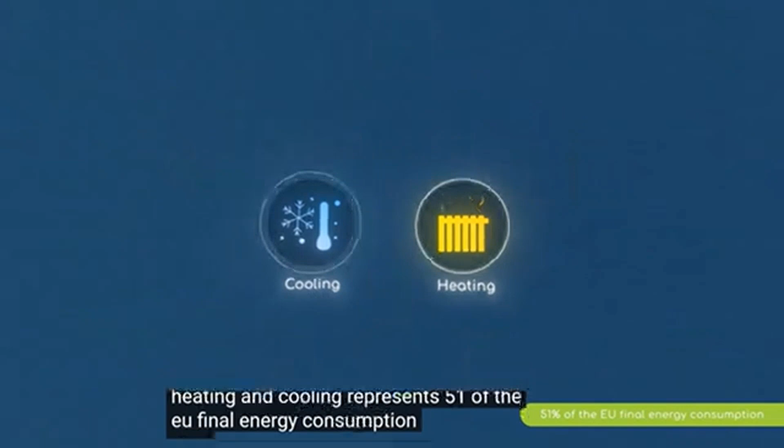Heating and cooling represents 51% of the EU final energy consumption. Over 3/4 of these needs are supplied by fossil fuels, unsustainable and harmful for the environment. Bioenergy is an available, local, renewable alternative, allowing local economies to thrive. It consists of using organic feedstock from agriculture, agro-industry, forestry and municipal waste to generate energy in various forms. 75% of bioenergy is used for heating and cooling, yet factors hinder its use.

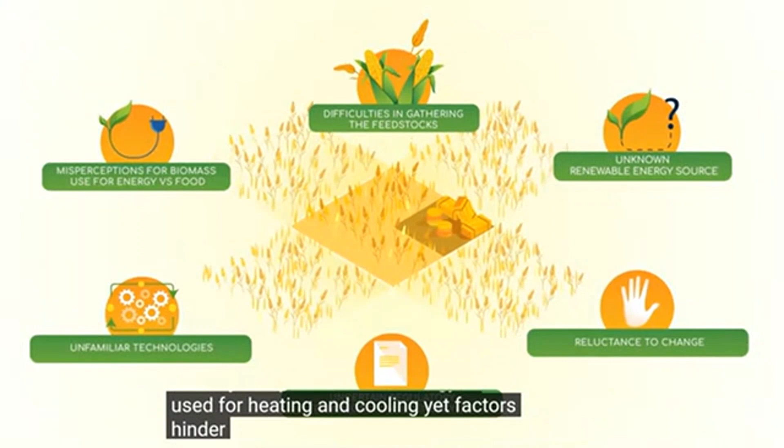Introducing BECoop, a project funded by the European Union, aiming to democratize the use of bioenergy for heating and unlocking the potential of community bioenergy. BECoop is inspired by the ResCoop model, allowing individuals and communities to reclaim and democratize a decarbonized and renewable energy production, a cooperation between users, logistic chain actors, and local authorities. This circular economy approach empowers individuals and territories that embrace it, increasing energy independence, security, and resilience through local resources. It allows heating cost savings at a lower environmental impact, increasing social benefits in terms of well-being and reduced energy poverty.

BECoop brings in knowledge and activities to improve the conditions to create a strong international bioenergy community. It provides tools to support existing and future community projects, making their development easier and further cutting down time and cost efforts. BECoop tests the implementation of community bioenergy heating schemes in 4 complementary pilot cases with different characteristics in Spain, in Greece, in Poland, in Italy. BECoop, unlocking the community bioenergy potential.

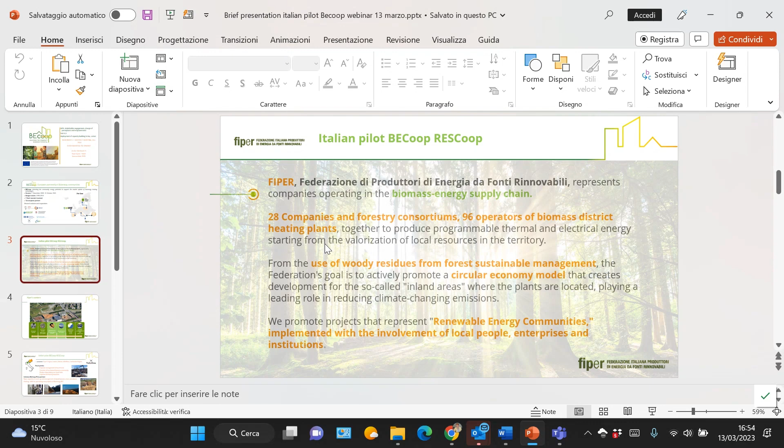There are here some numbers of FIPER, but if you want, we'll see later. I would like to show a little bit our reality as the Italian pilot. We identified 3 municipalities in Valtellina Valley: Tovo Sant'Agata, Lovero, and Mazzo Valtellina, situated in the Lombardia region in the north of Italy. We chose these municipalities because they were important focal points for us to develop and start sensibilizing the people to develop and make a startup of biomass district heating.

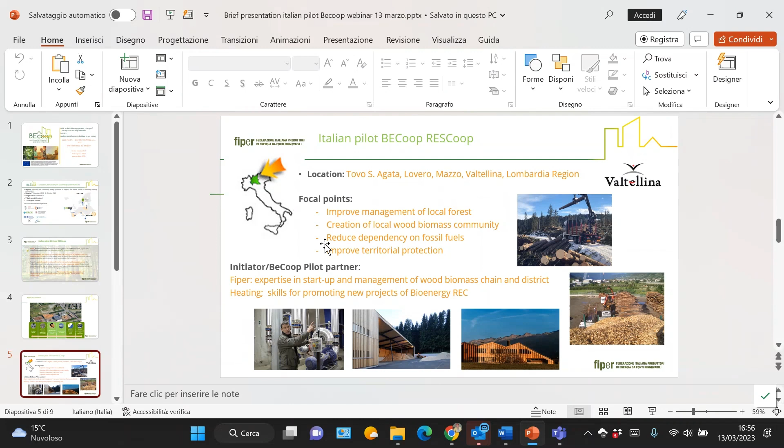There is a necessity to improve the management of local forests. There are a lot of forests, but the amount of wood cut is really small. The creation of a local wood biomass community, and of course, in this moment, reducing the dependency on fossil fuel - our goal is to reach autonomy from fossil fuel. We are the initiator because, as I said before, we are specialized in biomass district heating, and we support these three municipalities to start a new plant.

Some data - we always say that if you want to develop a biomass district heating, and Professor Caputo will explain better in technical terms afterward, the first thing you have to do is an analysis about the local biomass, the availability of local biomass. This year, there is a lot of potential biomass to use, from public forest, private forest, and also from pruning, so agricultural residues.

So we always say that if somebody, a municipality or an enterprise, wants to start with a biomass district heating, the first thing to check is the availability of biomass locally and in a short chain. We estimated the potential of biomass residue forest available in the area, and we realized that there is enough to develop the biomass district heating.

So why did we decide to involve these 3 municipalities? Because there are different companies, forests and expertise in the territory. The administrators and of course the mayors are really motivated because they wanted to implement a new biomass district heating to manage and to prevent the environmental risk in the mountain area.

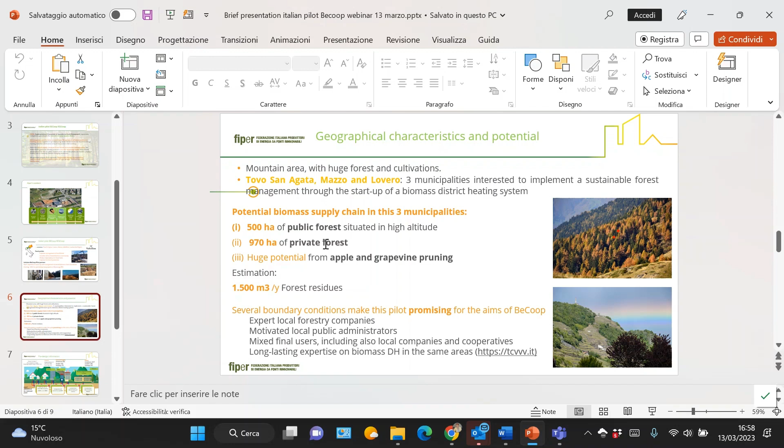Just a short. Just a summary. Hello.

Just a short, a really little picture about the idea of the project. We would like to start up this district heating in the center of the district. It will be located in Tovo Sant'Agata, and then the network will connect the people in Tovo, Mazzo and Lovero. So that one is really useful because it's a plant that will connect 3 different municipalities, and as you know, in mountain areas it is quite difficult to look for a consultation with different stakeholders.

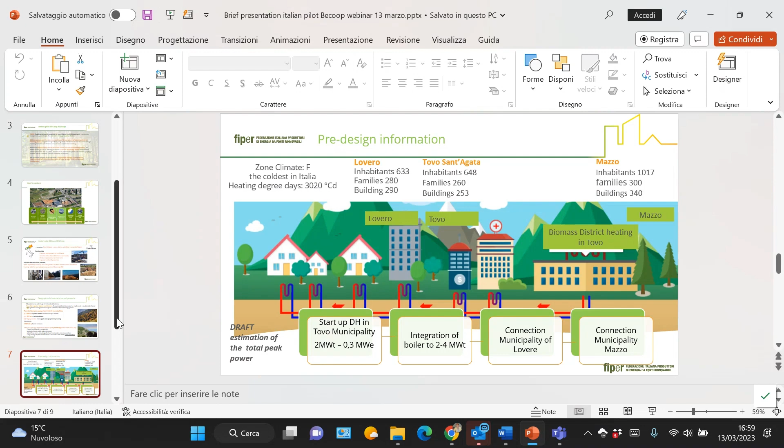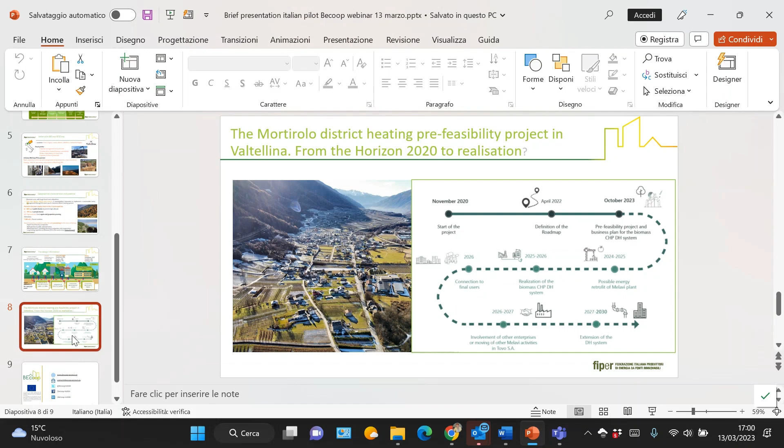What we did in collaboration with Politecnico was a participative process. We realized a roadmap from November 2020 until the development of the biomass district heating. And to sensitize the citizens, we realized a survey that was distributed in each building and each family. It was a really important action to sensitize, to involve more the people, the clients, the final users in the project.

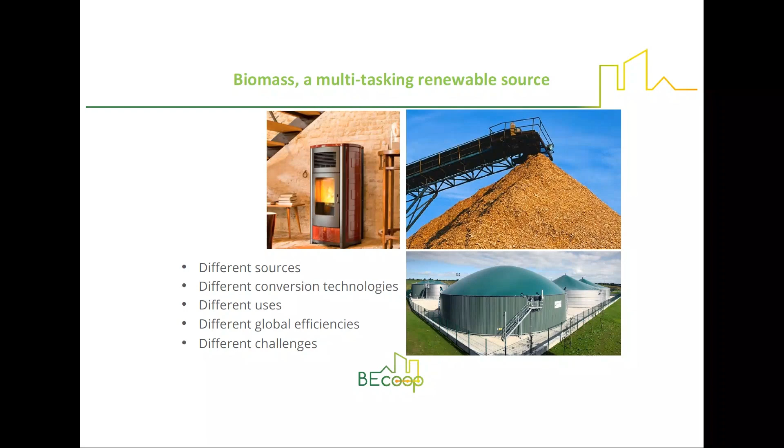So going to the next slide, we can have a look at the most adopted type of biomass in district heating systems. This form of biomass is represented by wood chips from forest maintenance and pruning that are suitably chopped and then can be adopted in combustion systems or other thermal systems. So we can go ahead with the next slide.

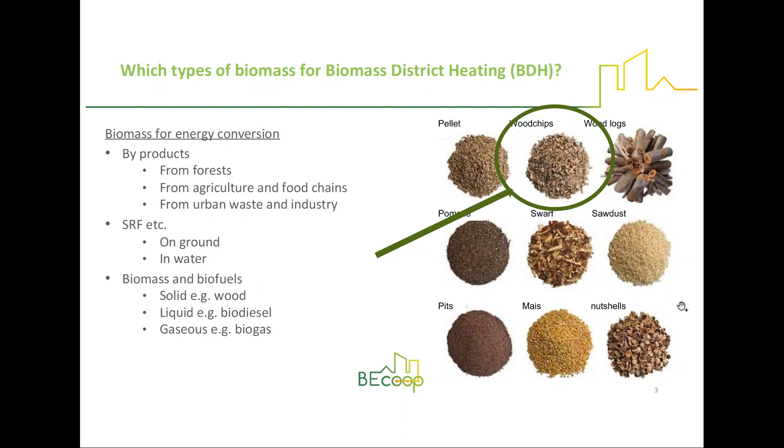And what about biomass district heating in order to exploit these renewable sources, contributing also to lower CO2? One raising question can be if biomass is a renewable and carbon neutral source. The carbon neutrality of biomass is a very discussed topic, and without going into detail, since these issues have been discussed and addressed for years, we can say just that biomass combustion returns the carbon stored during the tree growth to the atmosphere. So we can consider that the carbon cycle is neutral.

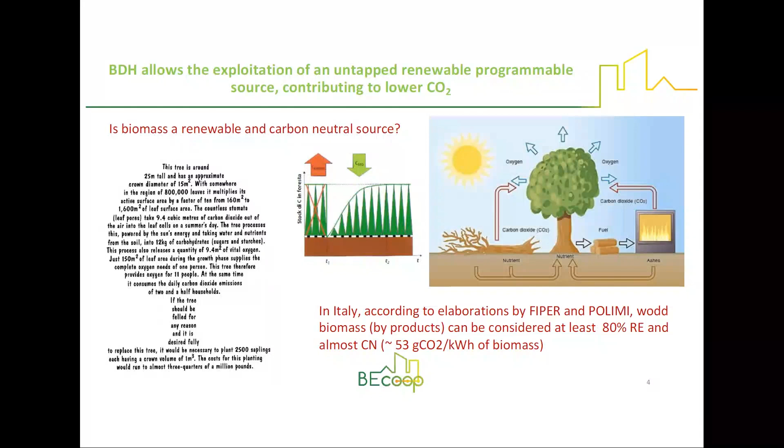Okay, but we can also consider the other CO2 emissions that we have along the overall chain, including also the transportation, the transformation, and so on. And here in red, you can see also the results that are valid for the Italian context. So we can consider biomass at least 80% as a renewable source. And okay, this data can be considered conservative, so we can be also more optimistic. And we can go ahead with the next slide, that is why adopt wood biomass for district heating.

Okay, for using biomass in district heating, we have to verify a set of favorable boundary conditions, such as, for example, as Vanessa told before, the availability of these sources at territorial level, but also the availability of a heating demand in the same territory, and also the availability of machinery for the treatment of biomass. In many cases, this source is more present than we can expect.

For example, if we consider Italy, differently than we might think, there is a big heritage in terms of forest and woodlands. This heritage represents about 1/3 of the Italian territory. And this land is constantly increasing. So it is being protected and managed. And the protection of woodlands represents a cost for the territory and for the country. But we can manage this territory properly in order to have benefits in addition to costs, so in order to have these sources for thermal purposes, for example, for district heating. We can go ahead with the slide.

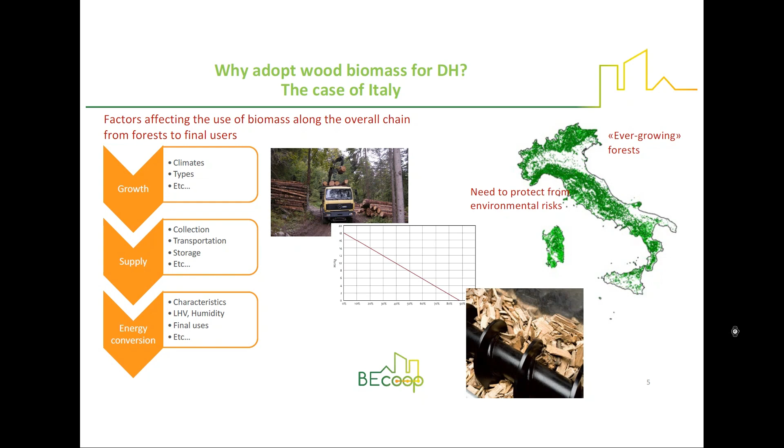Okay, so in addition to these issues, we have also to cope with the energy goals that we have at European level. And also we have to cope with other challenging global issues such as climate change and fossil fuel availability. So we have to take into account that biomass can help us also in this direction. And going ahead again, we have also a problem related to the approach to biomass, because this is a renewable source, but renewable and available does not mean wastable. So we have to adopt biomass with efficient, effective technologies.

Biomass is still adopted at world level in obsolete appliances, such as fireplaces, stoves, and so on. This equipment must be abandoned, and district heating, in this sense, can represent an effective technology to exploit this potential in an efficient way.

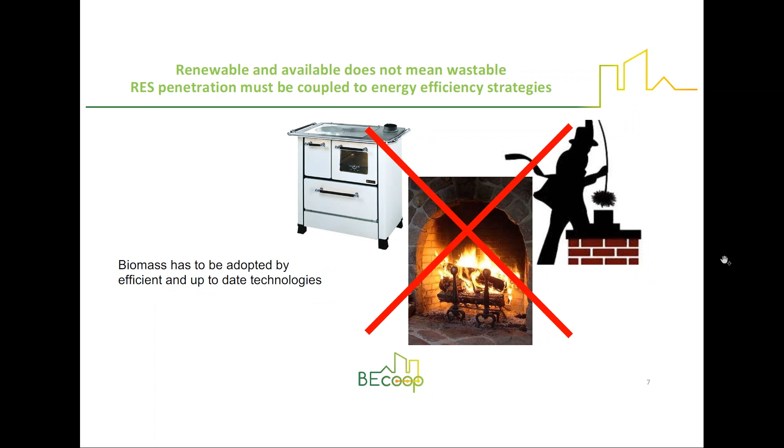Let's have a look at the main features that we can find in this slide. For example, the withdrawal in Italy is around 20–30% in our forests, and the average in Europe is about 60–70%. So we can exploit this source better. Biomass is programmable, and we can adopt this source for thermal use. So biomass district heating is the most effective technology to this end.

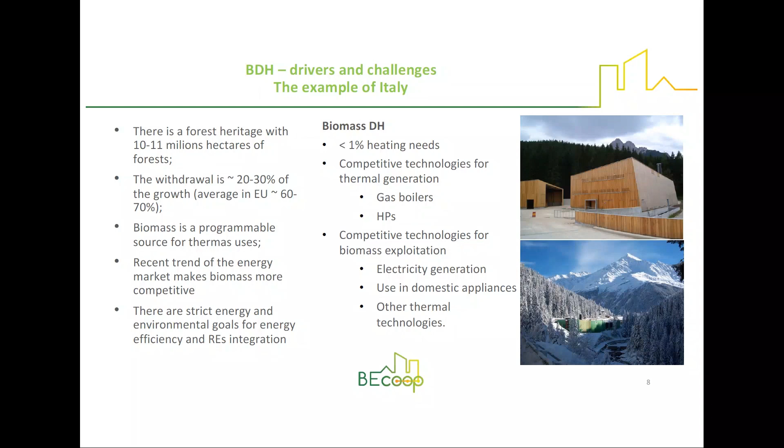Sorry, could you please switch off your microphone, because we can hear you. Okay, thank you very much. So we can go ahead again. I don't know if this... I refer to my slide that is process for the realization of a biomass district heating system. All good, we are there as well. Okay, thank you very much, Marine.

When we deal with this kind of system that is very complex, we have to consider several rings of the same chain. So we have to consider from the beginning to the final stages, and try to take together all these stages. So we have to consider the estimation of the source availability and also the agreements that we need for managing the biomass supply for our plant. Then we have to identify and involve the main stakeholders. Then we have to provide the most proper estimation of the thermal demand and evaluate the role of the final users, if these consumers have the willingness to be connected to our system.

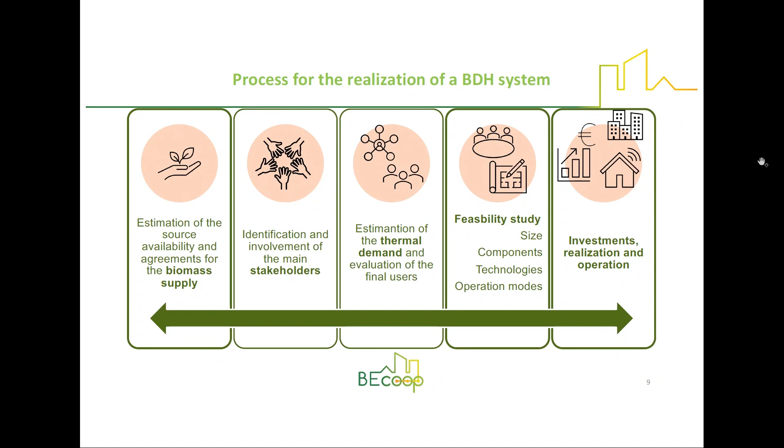Then we need to perform a complete feasibility study for determining the size, the types of components, technologies, the best operation modes, and so on. And then we have to consider the investment issues. So how to cover the investment needed for the realization of the thermal station, and in particular of the network, that is a very expensive infrastructure for the territory. So we have to consider all these aspects together, exactly as we are doing with the BECoop project for the pilot in Valtellina. Okay, I think that we can go ahead again.

So let's now go into detail about district heating, and let's consider the concept and the components. So in general, district heating means to supply heat or hot water from one source to a district or to a group of buildings. District heating allows supplying heat from the central station to the final user via a network of underground and insulated pipes carrying hot water. A heat network can cover a large area, for example, a city, or also a very small cluster of buildings.

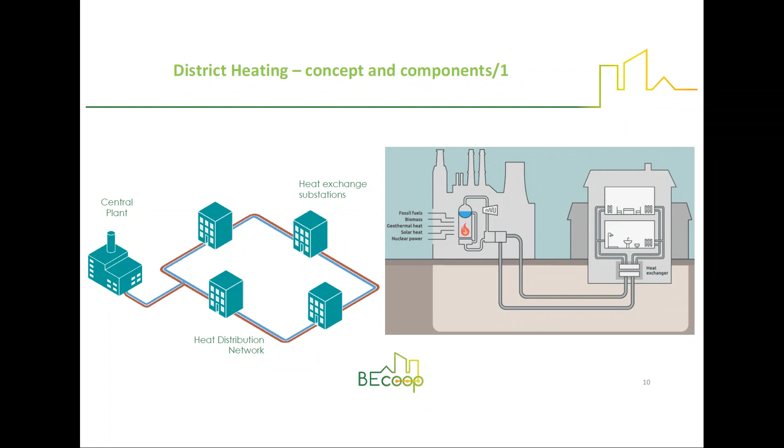The possible types of network can be branch, tree, or ring, but we can have also a meshed network. All these topologies can have benefits and costs. The most adopted topology is the branch one. And in this case, our carrier flows only in one direction, from the central station to the final user.

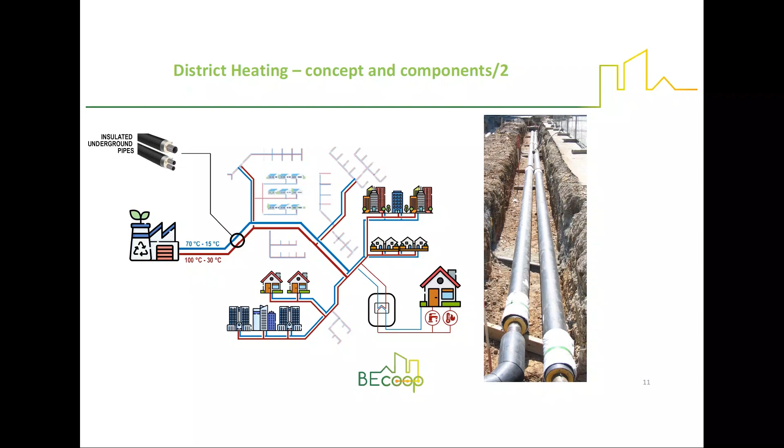Okay, let's go ahead. And now I can present the evolution of district heating. So let me give some general references of the history of district heating. Because indeed, district heating is a rather dated technology, not a new technology, but this technology is constantly evolving from the first generation to the last generation, according also to the evolution of the built environment and according to the innovation that we had and that we have about all these components.

For example, we can consider the first generation in which the carrier was steam. Then we have the second generation, the third generation. For example, the most adopted operation for biomass is the third generation. So the supply temperature in our cases is around 90 degrees, and the return temperature in the network is around 60 degrees for biomass district heating. These are the typical ranges of temperature.

But okay, this technology is in evolution, so we have to consider also that in the future we have to deal with these new components, new approaches. For example, we have to think about the integration of thermal storage and integration of other renewables in the same network that is mainly fueled by biomass. So we had also to find out the solution for boosting the transition from the third generation to the next generation of district heating, even if the source is biomass.

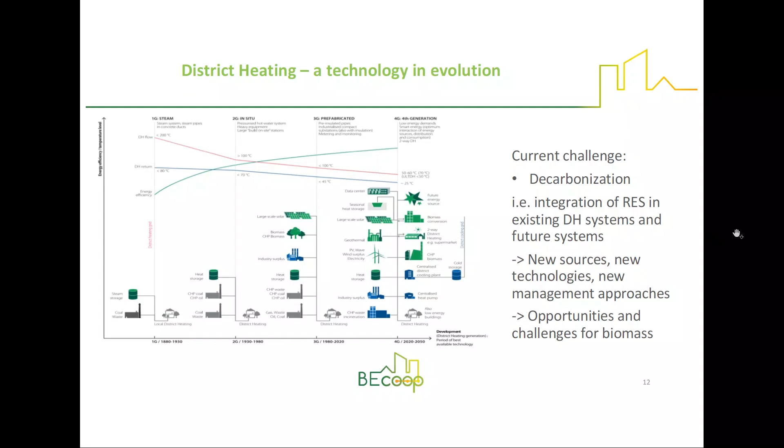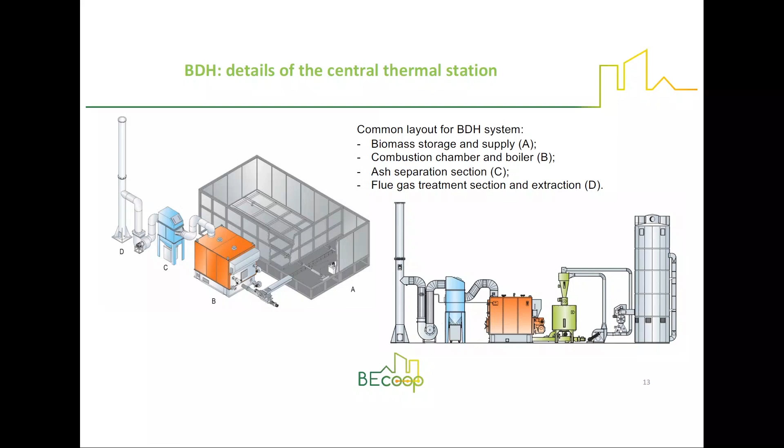So also for my students that are here in this room, maybe from your point of view, this is the most important part of the plant because it is at building level, so at the user level. So we have to take into account that we will need also a technical room in order to have all these equipments, but we don't need a large volume. It is very compact, the substation. Okay, so we can go ahead again, I think.

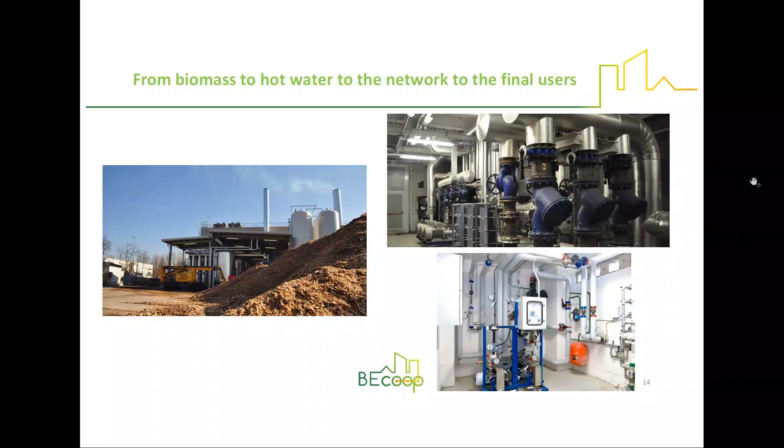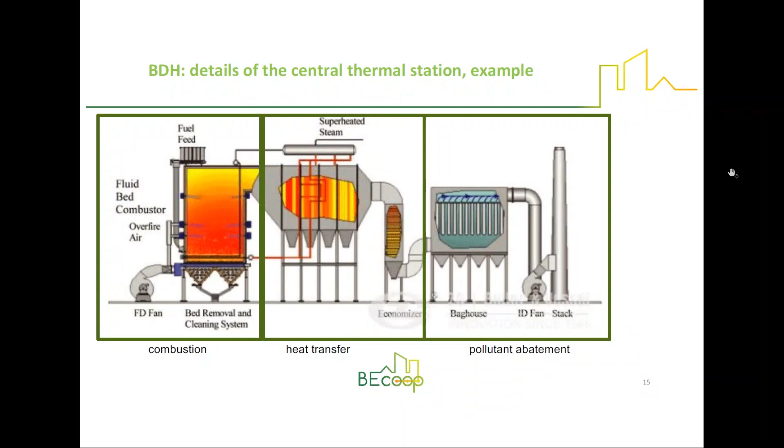And on the right of the slide, we can consider also the systems for the denitrification of the flue gas. So, for example, we can have a selective non-catalytic reduction or a selective catalytic reduction if we would like to drastically reduce the content of nitrogen oxides in the flue gas. Okay, and all these equipments allow us to have fewer pollutants with district heating, lower than we can have, for example, adopting domestic appliances, as we can see also later.

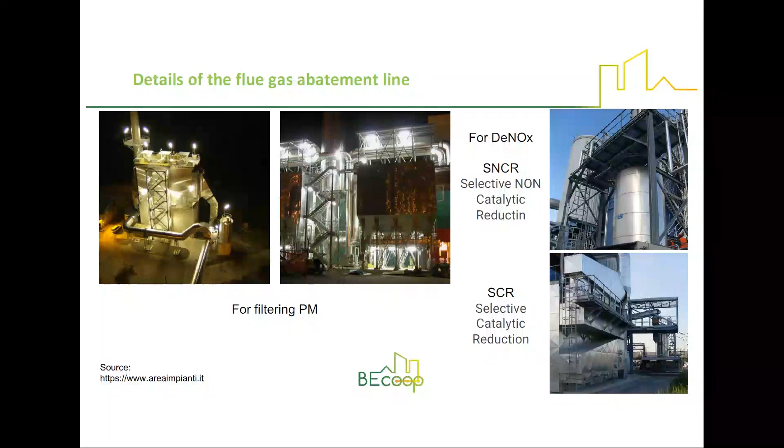And now we can consider also some details for the cogeneration.

We can have also another completely different approach, and we can consider, for example, the Stirling cycle, or we can take into account, for example, the pyrolysis and gasification of biomass, and then the adoption of the syngas in a gas turbine.

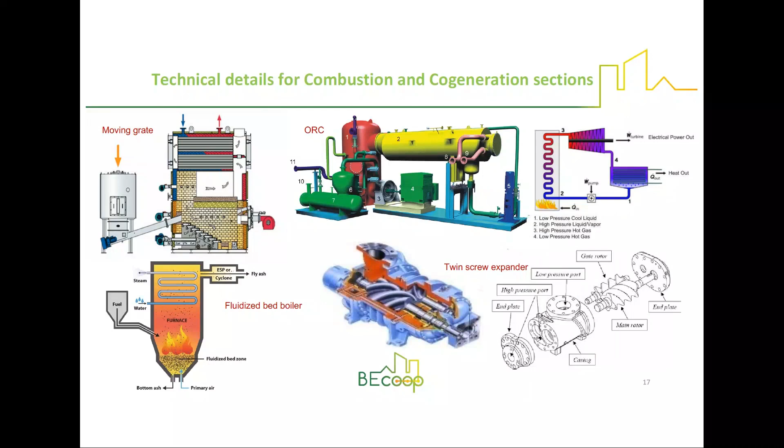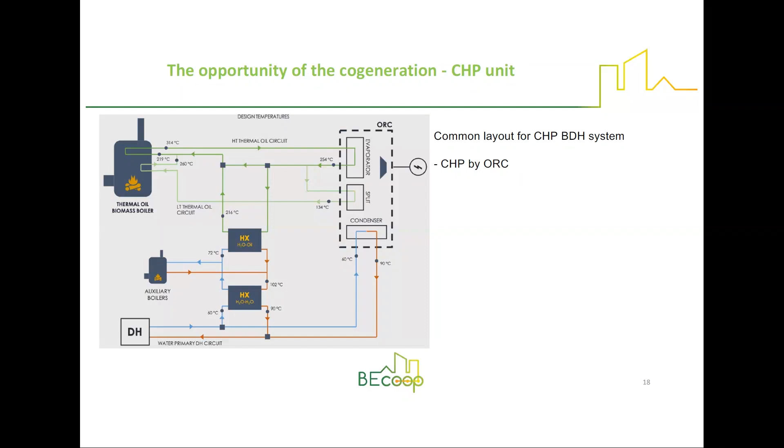Let's have a look also of a case study. For example, we can consider the Italian case study of Tirano, that is an existing biomass district heating system with 20 megawatt of biomass installed as thermal power, and with 1 megawatt of electric power installed. We have a very interesting network of 33 kilometers, and we have also 60 megawatt of thermal power installed at the final user. So this is very important because we consider a factor three from the thermal station to the final user.

And also the picture is very interesting because we can appreciate the surface that we have to guarantee for the storage and the supply of biomass. So we have a large area in order to store and treat biomass, wooden chips, for supplying then this source to the plant. And then we have, of course, the different sections of the plant with the combustion section, the flue gas treatment, the pumping station in order to pump hot water to the network, and offices, and so on. It is interesting to observe that on the roof of the offices, we have also some photovoltaics installation to produce also, in addition, renewable electricity.

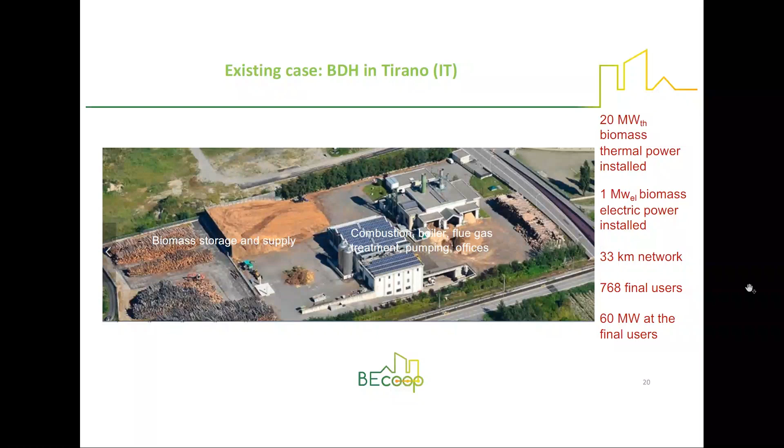So now we can go ahead again, and just for giving some results again related to the Italian context, we can talk of a quite recent publication edited in collaboration with FIPER. So this publication refers to a wide survey because we consider 82 plants with a lot of megawatt of biomass installed, and we can try to understand some results about the size of these plants and about the performance of these plants. For example, we are dealing with quite small systems. So we have a lot of systems in the range from 5 to 10 megawatt of thermal power.

Almost half of these systems operate in cogeneration, so they are combined heat and power systems. But the size of the cogenerator is under 1 megawatt of electricity in general. And most of these systems are located in territories without the connection to the natural gas grid, but we have also about 1/3 of plants located in a zone with the natural gas grid. And we can consider also the average value of the thermal efficiencies that are around 80%, while the electric efficiency for the cogenerative systems is around 15 or 18%. So we can conclude also that all these technologies are available on the market, are mature. We have, of course, the very high cost for the realization of the network, but we can also have some benefits in selling both electricity and heat.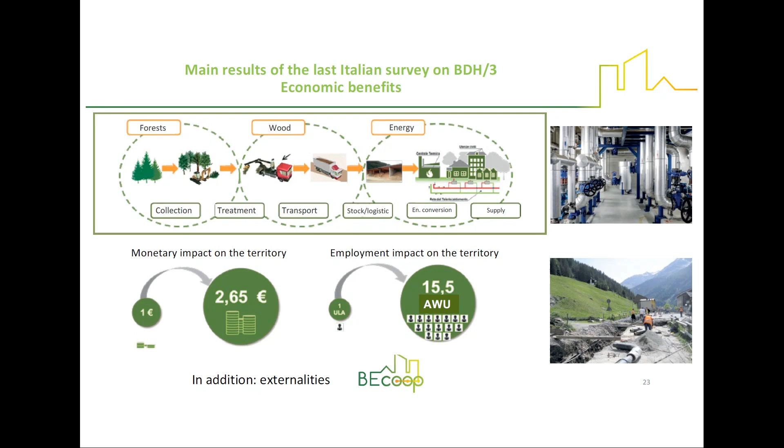So we can go ahead again, and also in terms of environmental benefit, for example, if we consider the comparison between biomass district heating and domestic use of biomass, we can have also interesting savings in terms of particulate matter. So the emission factors that we have for biomass district heating systems are similar, for example, to the emission factors that we have for oil boilers in terms of emissions of particulate matter. And this is a very important issue in order to give a proper knowledge about this source.

Okay, all these results are related to our survey, so are related to the Italian context of operation, are related to the systems that gave us information and so on. So they are not general conclusions, but are related to our survey.

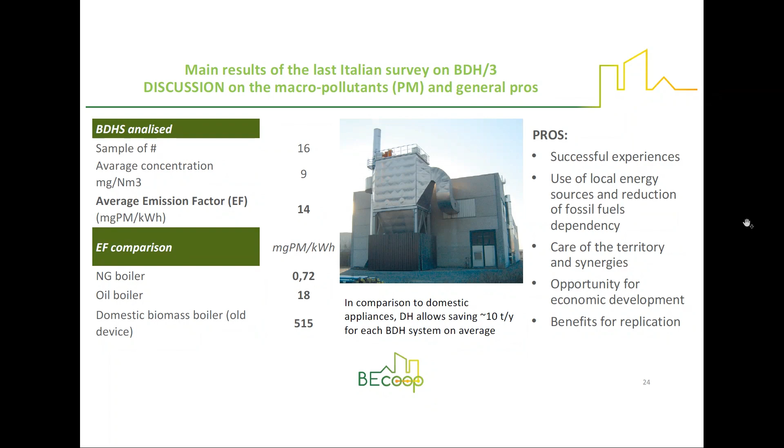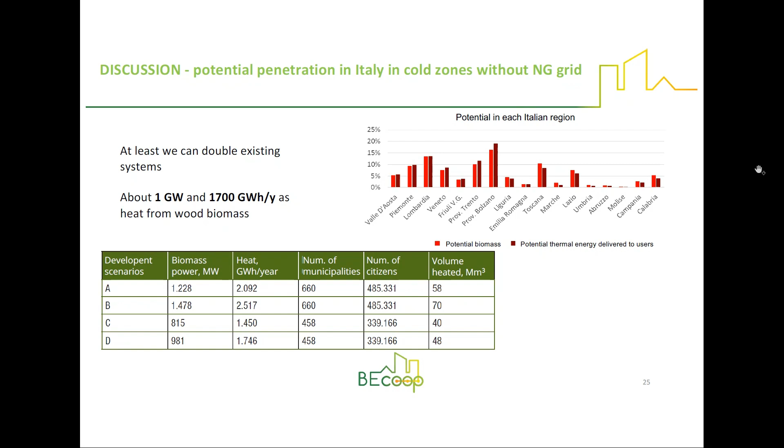Then another barrier is related to the unexploitable biomass because of some logistic constraints. For example, if we have biomass that is far away on high mountains, we can't go and take these sources with a proper cost. And then we have another important barrier that is related to the NIMBY or NIMTO syndromes. So not in my backyard and not in my term of office, but with proper information, such as the information in the framework of the BECoop project, I think that also this barrier can be overcome.